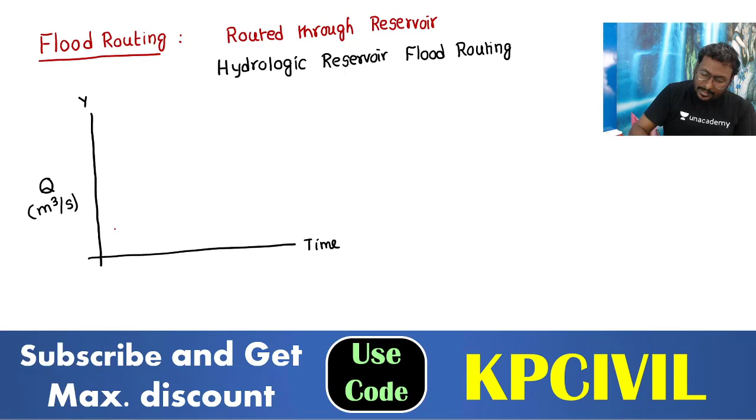Very importantly, the outflow flood hydrograph does not start immediately because there is storage, because there is a reservoir. Due to that reason, after a certain time delay, we get the outflow flood hydrograph. This is the peak of the inflow flood hydrograph, and this one is the peak of the outflow flood hydrograph.

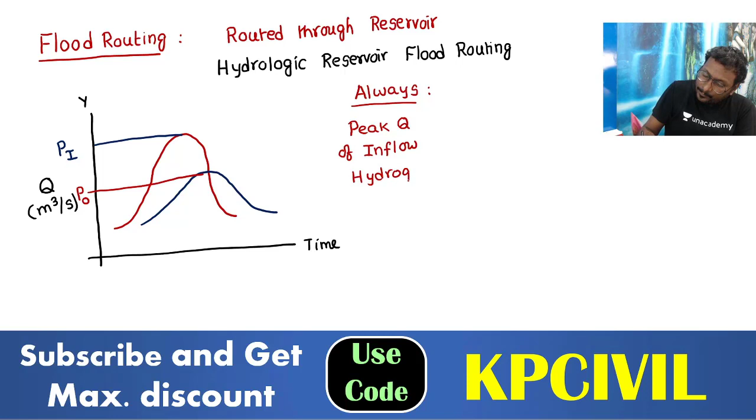Always remember this important statement we learn during hydrologic flood routing: the peak discharge of the inflow flood hydrograph is always greater than the peak discharge of the outflow flood hydrograph. No doubt about it. Because under any circumstances, if you are studying hydrologic reservoir flood routing, storage is going to happen between inflow and outflow. There is a time delay in the starting of inflow and outflow hydrographs. Ultimately, the inflow flood peak is more than the outflow flood peak.

Coming to the question: the peak of the inflow hydrograph is Pi, and the time of occurrence of the peak is Ti. From this, Pi we have already written. The time of occurrence is occurring here, which we will consider as Ti, time of occurrence. So the peak of the inflow hydrograph occurs at a time called Ti.

That is according to the given question. Next, the peak flow of the outflow hydrograph is P0 and the time of occurrence is T0. We write this down. So P0 is the peak of the outflow hydrograph occurring at time T0.

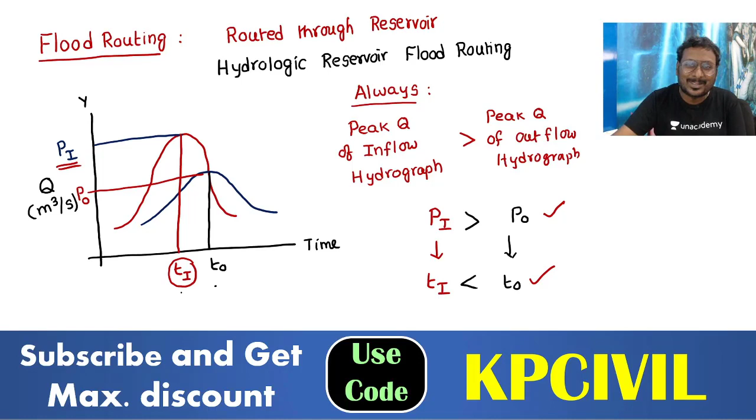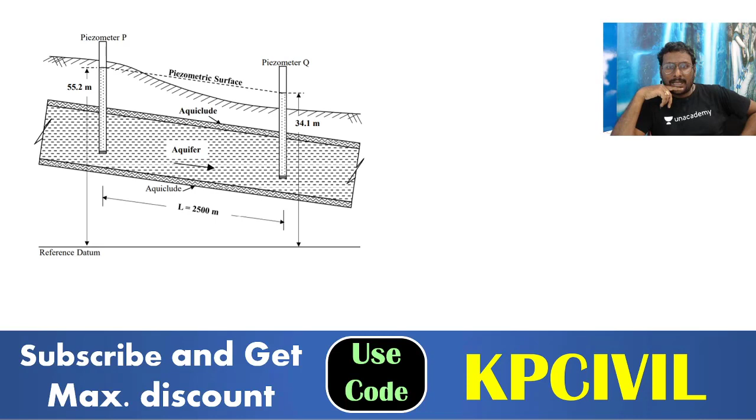Okay, next one. A confined aquifer of 15 meter constant thickness is sandwiched between two aquicludes as shown in the figure. Where is the figure? Where is the figure? So this is the figure. So confined aquifer of thickness 15 meter.

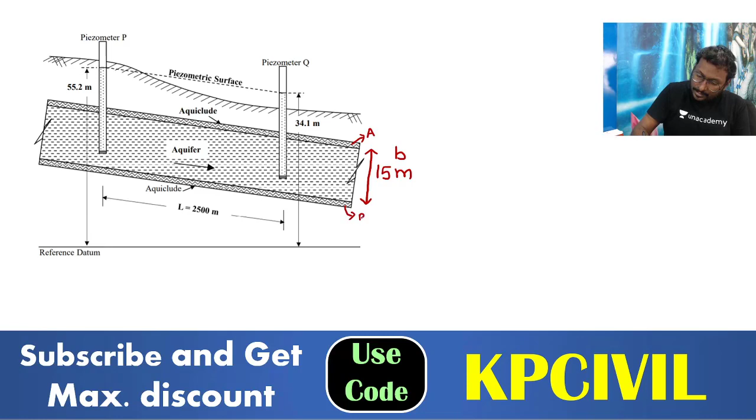This is the thickness of aquifer, depth of aquifer 15 meter. B, thickness of aquifer B, 15 meter, between two aquicludes. This is aquiclude 1, this is aquiclude 2. Take aquiclude A, aquiclude B. These are the two aquicludes provided.

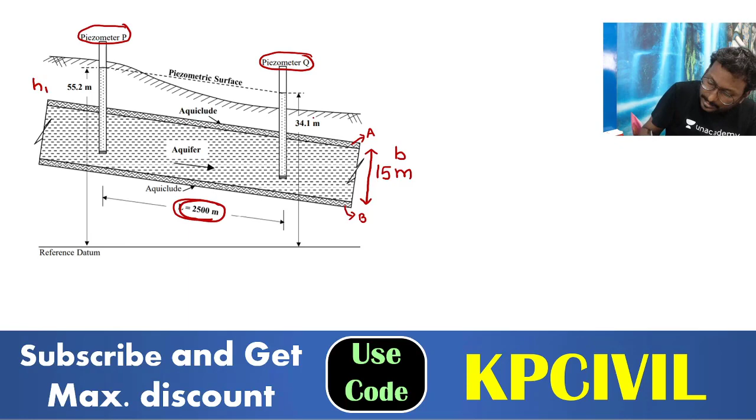And their distance between one well, one piezometer to other piezometer, piezometer P and piezometer Q, 2500 meters. The H1 is 55.2 meter, H2 is 34.1 meter. What is the question?

We'll go ahead. Two heads indicated by two piezometers P and Q, H1 55.2 meter, H2 34.1 meter respectively. Aquifer has hydraulic conductivity K value provided, 80 meter per day, and its effective porosity is 0.25, N is equal to 0.25. Distance between piezometers 2500 meters.

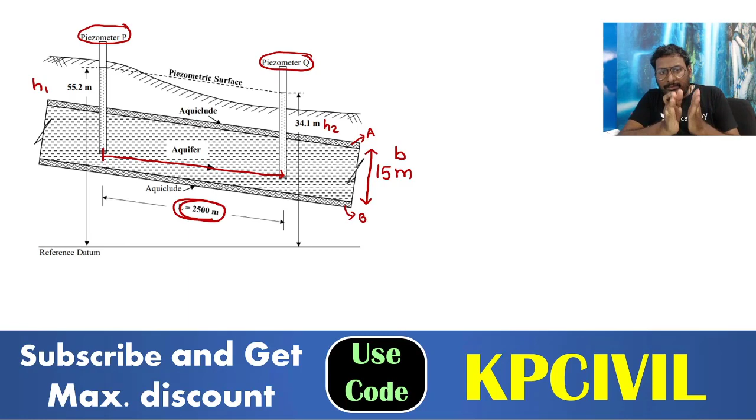The time taken by the water to travel through the aquifer from piezometer location P to Q, in days. So how much time will the water take to travel from this piezometer to this piezometer? Time taken by the water to travel from piezometer P to piezometer Q. Time is equal to...

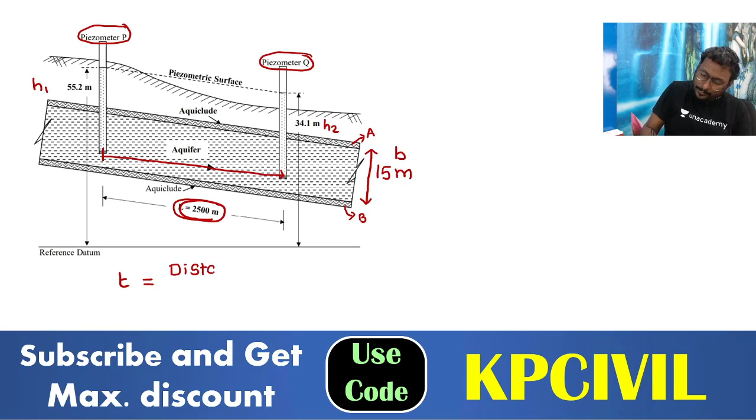General formula, several times we are studying this. Time is equal to distance by velocity. Distance already known, L. Velocity V to be determined. Distance given, 2500 meters.

So now we need to determine velocity. Velocity is equal to K into I. What is I? Gradient. I is gradient, delta H by L. That is equal to K into H1 minus H2 by L. Here, velocity is equal to K into H1 minus H2 by L.

But for flow velocity, the actual stream velocity required is the actual flow velocity, V by N. We can take the porosity provided. So the first one is apparent velocity, the second one is actual flow velocity. We'll consider actual flow velocity. This is V is equal to V by N.

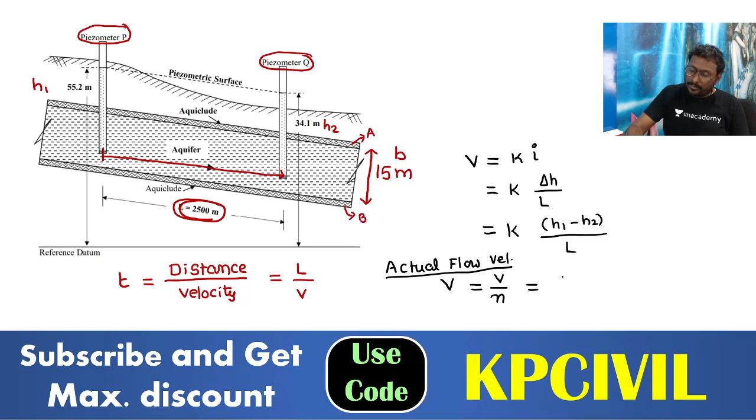So how can we write this down? K by N, H1 minus H2 divided by L. That is the actual flow velocity. So if you determine actual flow velocity, substitute that actual flow velocity in this formula to get time of travel.

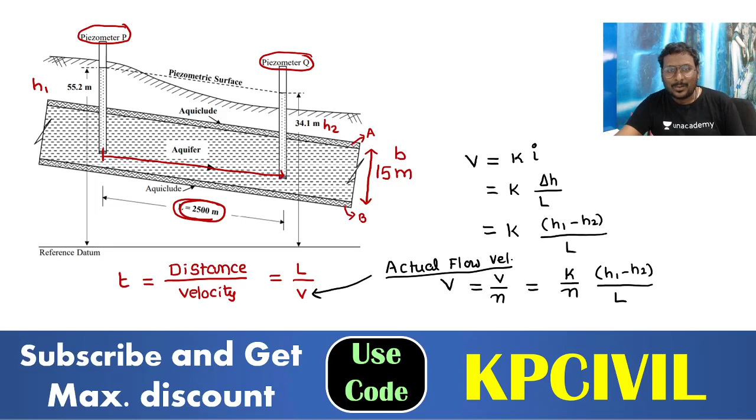Okay, we'll move ahead. Now, actual flow velocity V is equal to K, 80 meter, divided by N. What is N? Porosity. Porosity provided, N we have written here, 0.25. H1 minus H2, H1 is 55.2, H2 is 34.1.

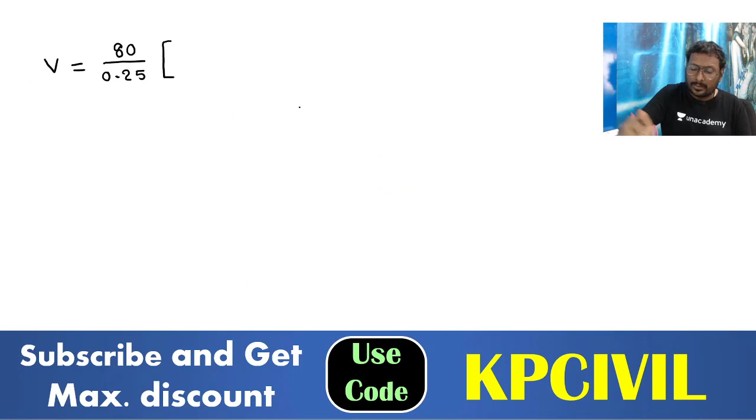We write down 55.2 minus 34.1. Length of travel, distance of travel, 2500. 55.2 minus 34.1 divided by 2500. So we got the velocity. Estimate this velocity: 80 by 0.25 into 55.2 minus 34.1 divided by 2500. What is the velocity you are getting?

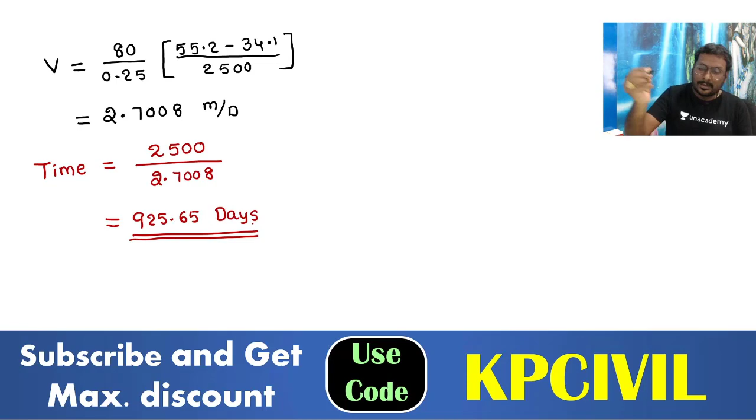2.7008 meter per day, because hydraulic conductivity is given in terms of day only. So now time required is equal to length 2500 meter, distance of travel, velocity 2.7008 meter per day, you are getting time in number of days. This is the value: 925.65 days. You substitute, write down 925.6 days, rounded off to one decimal value. So the question is related to what topic?

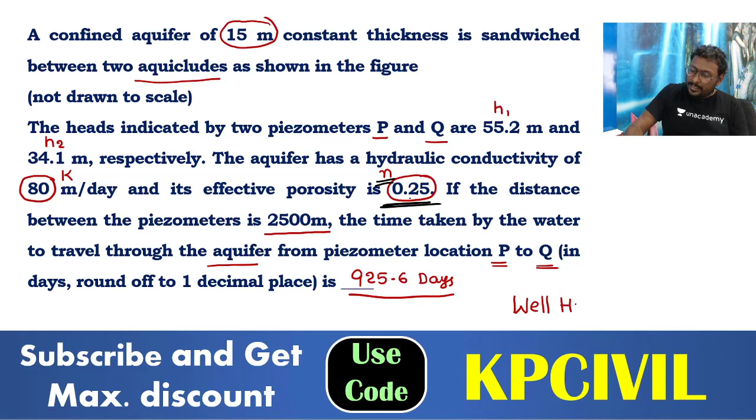Well hydraulics. The question is related to well hydraulics. Previous one is flood routing. Now this one is well hydraulics.

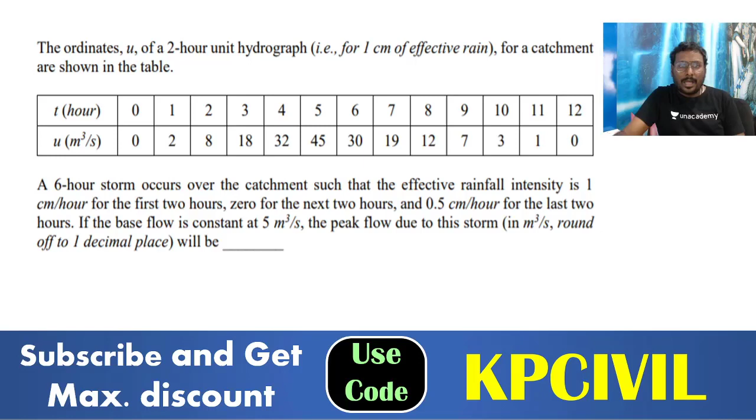Okay, we'll move on. Hydrograph. Always we have one mandatory question related to hydrograph. In my several classes also I used to say, without hydrograph there is no GATE question paper. Again we have the hydrograph question. The ordinates U of 2-hour unit hydrograph. Unit hydrograph is nothing but for 1 centimeter effective rainfall, for a catchment area as shown below. So T and U, unit hydrograph ordinates, 0 to 12 hours, each 1 hour time difference. U is discharge in meter cube per second, unit hydrograph discharge for each 1 hour.

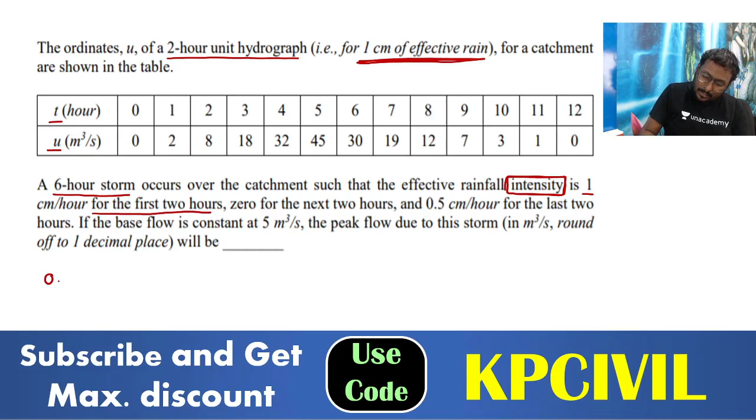A 6-hour storm occurs over a catchment such that effective rainfall intensity - very important point - the data provided is effective rainfall intensity 1 centimeter per hour for first 2 hours, so 0 to 2 hours. What is the rainfall intensity? 1 centimeter per hour.

You write down effective rainfall depth in such a case. Intensity given is 1 centimeter per hour. What is depth in such a case? For 2 hours, for 1 hour 1 centimeter, for 2 hours 2 centimeter depth.

0 for next 2 hours. No problem, 0. For next 2 hours, 3 to 4 hours, it is 0 centimeter per hour. You take next 2 hours depth is 0 centimeter. No need to consider at all, not required that one.

And 0.5 centimeter per hour for last 2 hours, 5 to 6, last 2 hours. 0.5 centimeter per hour, so for 1 hour 0.5 centimeter. For 2 hours how much? For 2 hours we can take 0.5 into 2, that is equal to 1 centimeter. So effective rainfall depths for each 2-hour duration: first 2 hours 2 centimeter, next 2 hours 0, next 2 hours 1 centimeter.

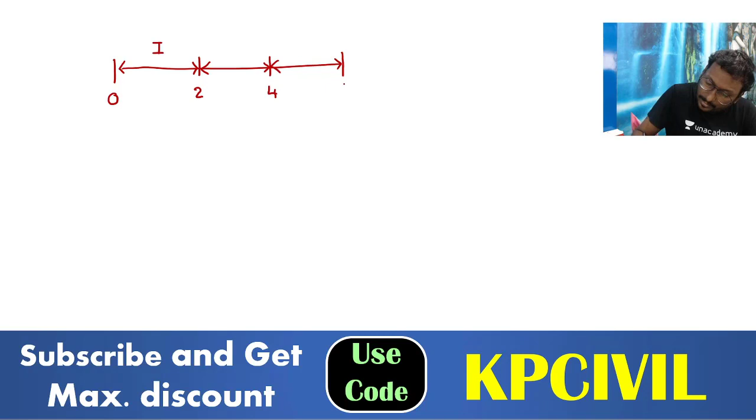So I will plot this, so that it is easy for you. This is a 6-hour rainfall. First rainfall 0 to 2. Second rainfall 2 to 4. Third rainfall 4 to 6. 3 rainfalls given, total 6-hour rainfall. Total 6-hour storm event divided into 3 individual storms.

First rainfall of 2 centimeter depth. Second rainfall of 0 centimeter depth. Third rainfall of 1 centimeter depth. Okay. P1, P2, P3. Actually, these are not rainfalls - remember, effective rainfall, direct value. Effective rainfall depths only, direct values.

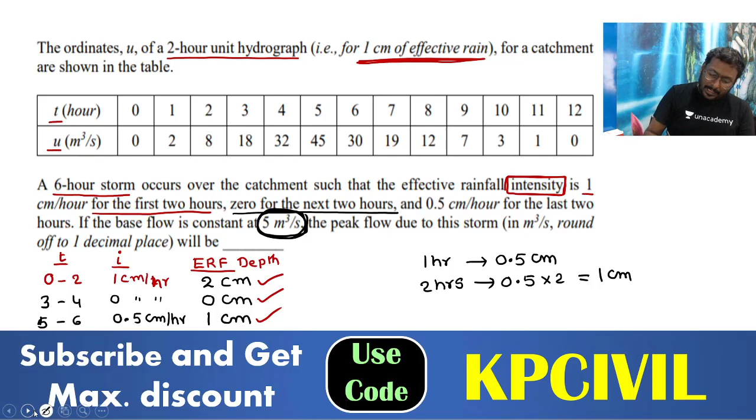Done. The base flow is constant at 5 meter cube per second. Peak flow due to the storm - peak flow means what you need to determine? Discharge of flood hydrograph. Peak discharge of flood hydrograph for the storm is how much? This is to be determined. That is to be determined. But very complicated thing here.

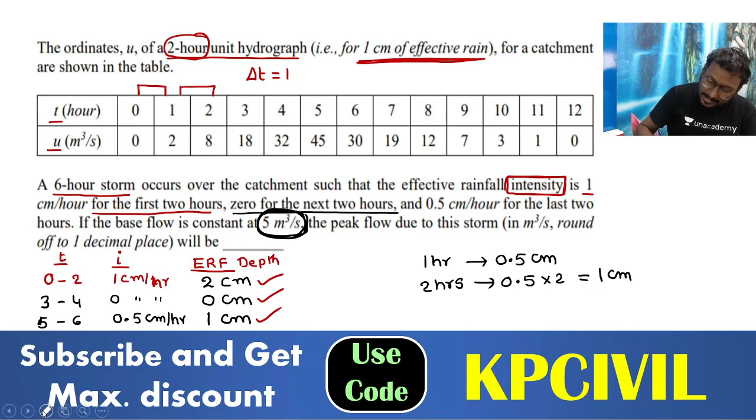Given is 2-hour unit hydrograph. The time difference provided, delta T provided, data provided is for 1 centimeter - sorry, 1 hour. The time difference provided is for each 1 hour they have provided. But rainfall occurred is a 2-hour unit hydrograph. Okay, we'll move on now.

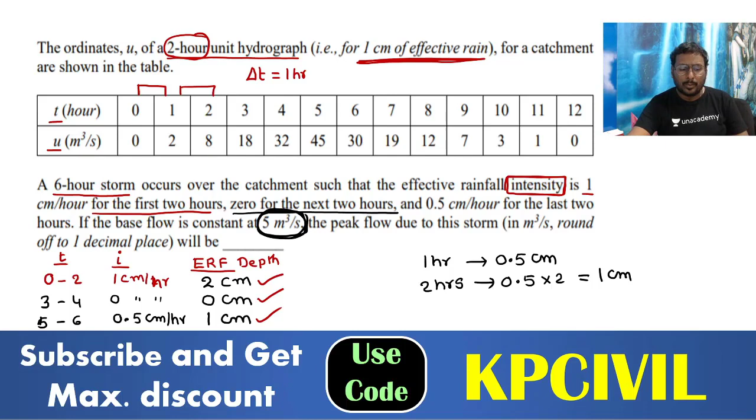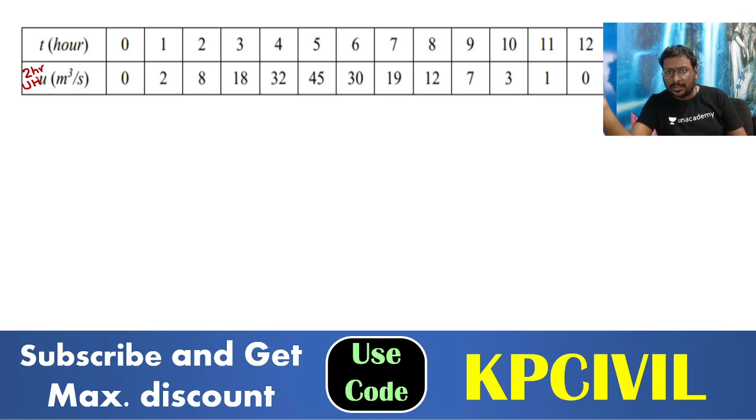So this is the data as it is you are writing. You write down same table, same column, given data you are writing same. This is a 2-hour UH ordinates, given from first hour onwards: first hour, second hour, third hour, fourth hour. First hour onwards they have provided.

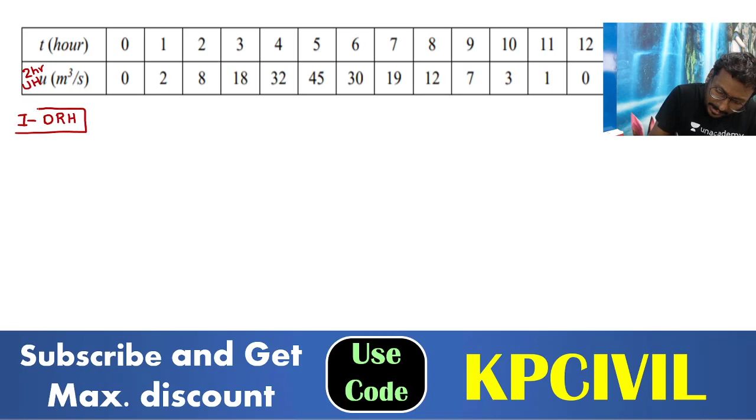Now, DRH for first rainfall - direct runoff hydrograph for first rainfall. So you have already UH. So DRH is equal to QUH into effective rainfall depth. QUH into effective rainfall depth we are taking.

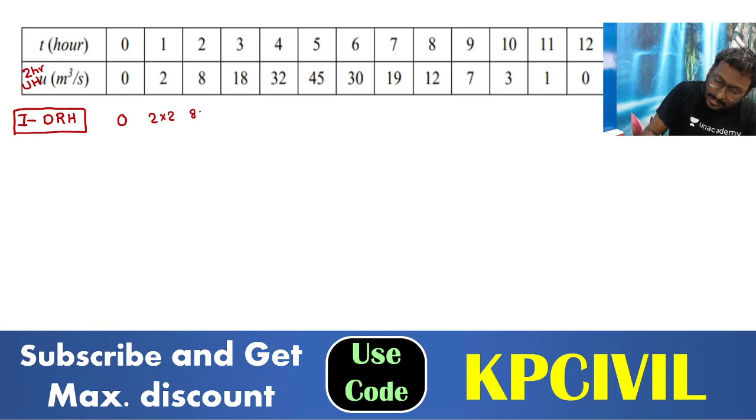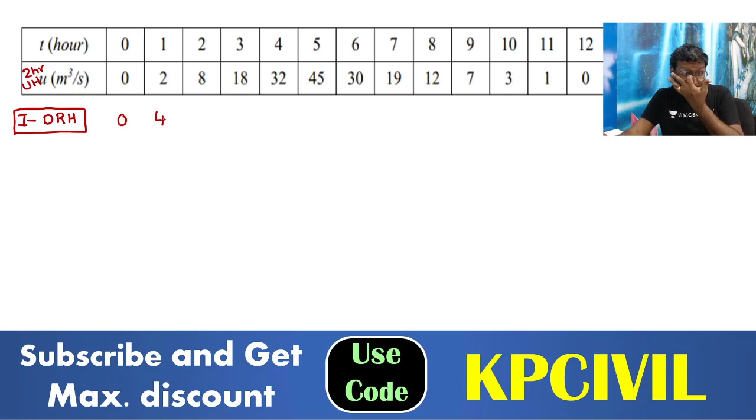So as it is, for the first rainfall, it is started at 0th hour, produced discharge on the first hour itself. So as it is you take multiplied with 2. Means you can write down 0, 2 into 2, 8 into 2, 18 into 2, like that you can multiply, 32 into 2. So I am writing direct multiplication values here. 2 into 2, 4. Why am I multiplying, tell me? Because effective rainfall is equal to 2 centimeter.

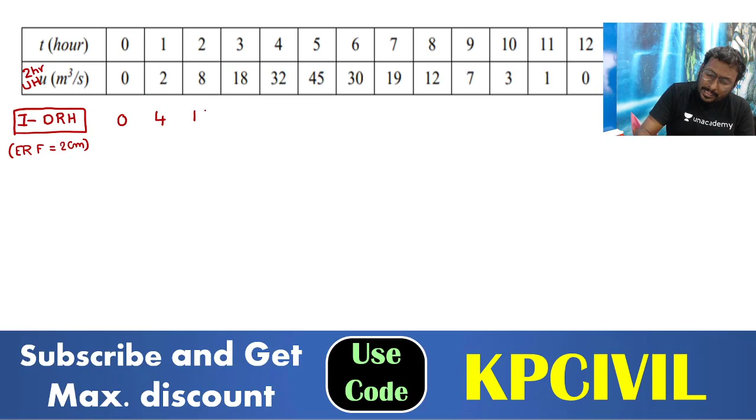DRH is equal to UH into effective rainfall. So 2 into 2 is 4, 8 into 2 is 16, 18 into 2 is 36, 32 into 2 is 64, 45 into 2 is 90, 30 into 2 is 60, 19 into 2 is 38, 12 into 2 is 24, 7 into 2 is 14, 3 into 2 is 6, 1 into 2 is 2.

Is it necessary to take second rainfall? Second rainfall not at all required. Directly I am jumping to third rainfall, because second rainfall has not yet produced any kind of depth. So all DRH values of second rainfall are 0, because you are multiplying with the direct runoff. If DRH values are taken as 0, then 2 into 0, 8 into 0, 18 into 0, all are 0 values only. No need to take second rainfall, not required.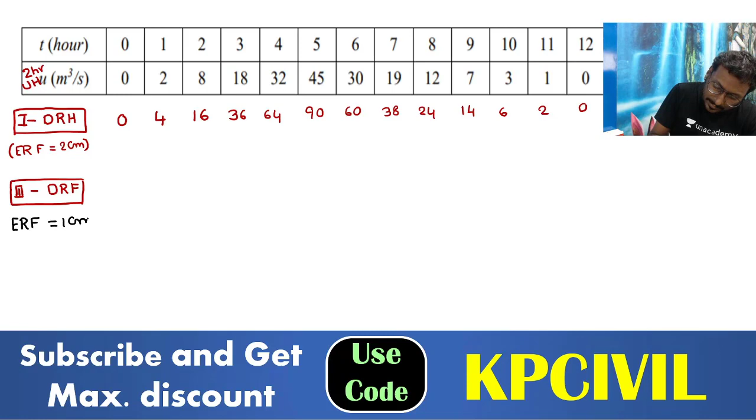We are considering third rainfall, effective rainfall depth of 1 centimeter. Third rainfall is contributing, given clearly, effective rainfall of 1 centimeter. When it started discharge is very, very important. The third rainfall started discharging at the 5th hour. So the discharge value starts at the 5th hour. Before the 5th hour, all values are taken as 0, not considered. Only from the 5th hour you can start the values. So you take here 0, 0, 0, 0, 0. Then as it is, you can consider these values delayed by 4 hours. Lag or delayed by 4 hours.

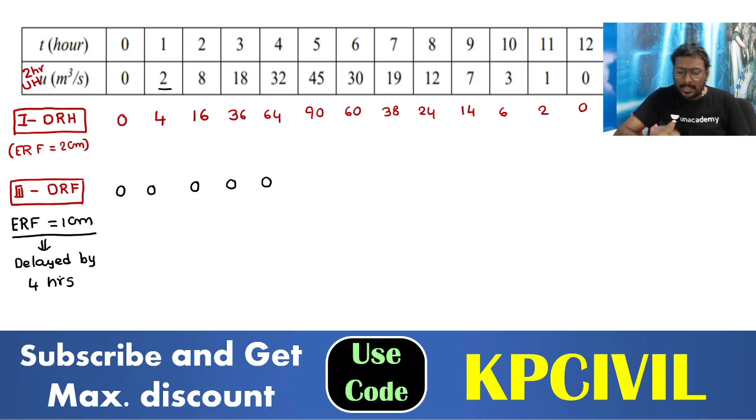From the fifth hour onwards, you write down the same value. Same, why are we writing the same? Because it is 1 only, 1 centimeter only. It is 2 centimeter that we multiplied earlier. Now it's 1 centimeter only, so just as it is, we are writing 2, 8, 18, 32, 45, 30, 19, 12, 7, 3, 1, 0. We don't want all the values because we need peak discharge.

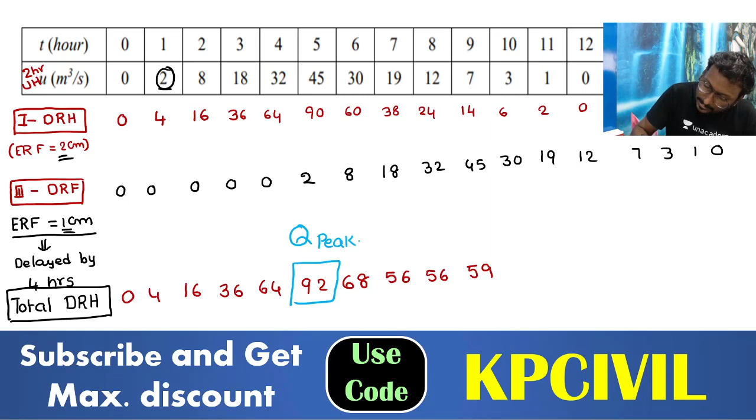We need only peak discharge, we don't want all the values. So what is the highest of the given values? Add it now, total DRH we can write down. Total direct runoff ordinate values, total DRH values, you just add it now. So while adding, what is required? 0, 4, 16, 36, 64, 92, 68, 56, 56, 59. Do you need all this? No, only peak. Already you attained the peak now. You got the peak value now. Already you obtained the peak. This is Q peak of what? DRH. So Q peak of DRH you got is 92.

The question is about peak discharge of FH, the flood hydrograph peak discharge. Flood hydrograph peak discharge is equal to direct runoff hydrograph peak discharge plus base flow. So we can take it now: 92 is the direct runoff hydrograph peak discharge, plus base flow. We identified 92. Base flow is 5 meter cube per second, you can take directly. 92 plus 5 is 97 meter cube per second. So flood hydrograph peak discharge is equal to direct runoff hydrograph peak discharge plus base flow, 92 plus 5, that is equal to 97 meter cube per second. Okay, simple question. 97 meter cube per second, you are getting the answer.

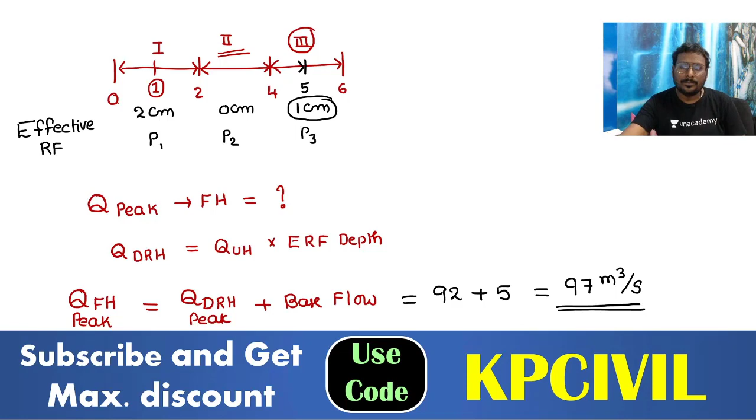You move on to the next one. Clear for everyone? You go ahead.

A catchment may be idealized as a rectangular catchment. There are 3 rain gauges located inside the catchment. So this may be taken as a catchment, with 3 rain gauges A, B, C given at arbitrary locations. The average precipitation over the catchment is estimated by 2 methods: Arithmetic mean method and Thiessen polygonal method. Which one of the following statements is correct?

PA is always greater than PT? No. PA is always equal to PT? There is no relation. First of all, there is no relation between the arithmetic mean method and Thiessen polygonal method, so we can't say whether it is equal to, greater than, or smaller than. So what is the answer? There is no definite relation between PA and PT, they are just 2 independent methods. Arithmetic mean method and Thiessen polygonal method are 2 different independent methods, there is no direct or definite relationship between PA and PT. So the answer is option D.

Okay, we'll move on. The probability that annual maximum flood discharge will exceed 25,000 meter cube per second at least once in the next 5 years. At least once means P1 in the next 5 years. P1 in the next 5 years is found to be 0.25.

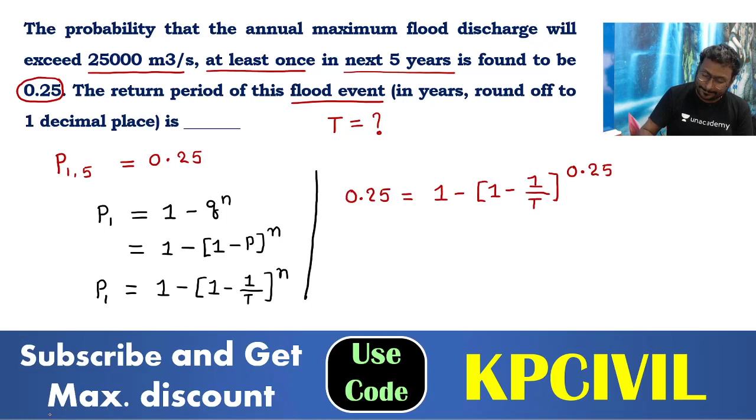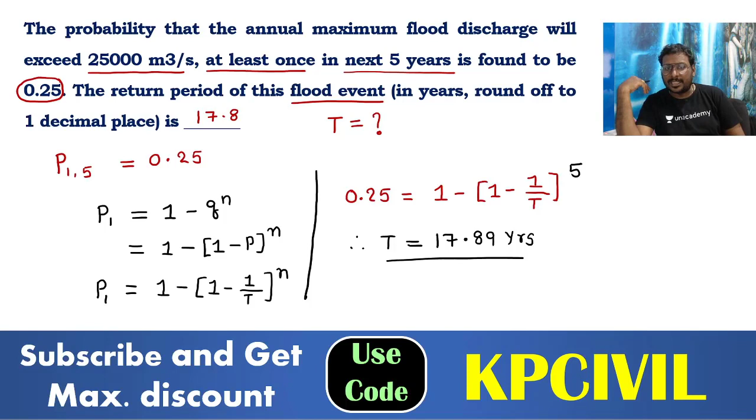0.25, P1 is equal to 1 minus 1 by T, this is to be determined, whole power N. Wait, what is N value? N value is 5. So 0.25 is equal to 1 minus 1 by T whole power 5. So what is T? Determine it, solve it. Solving, you get T value: 17.89 years. So the return period is 17.89 years. Up to one decimal place, you can say 17.8 or 17.9 years, anyone will be accepted. So in the return period formula, P1 is equal to 1 minus 1 by T whole power N. P1 and N substituted, T is obtained as 17.89 years. We move on to the next.

If you remember the formula, all questions related to flood frequency are completed, because it includes everything: Q is equal to 1 minus P, P is equal to 1 by T, and this itself is taken as hydrologic risk R. Both are taken to be the same — at least once occurrence. Okay, we'll move on.

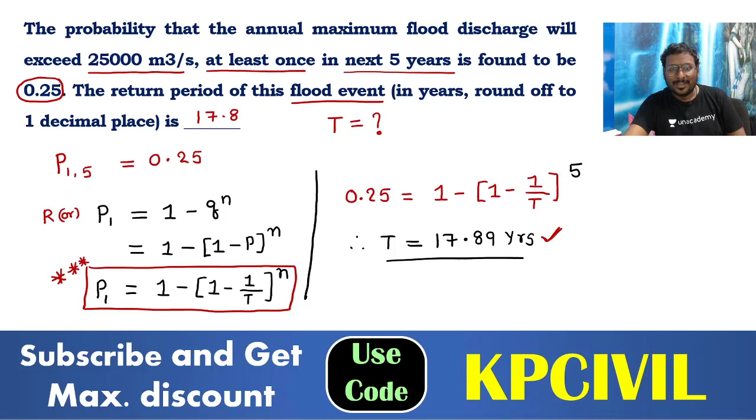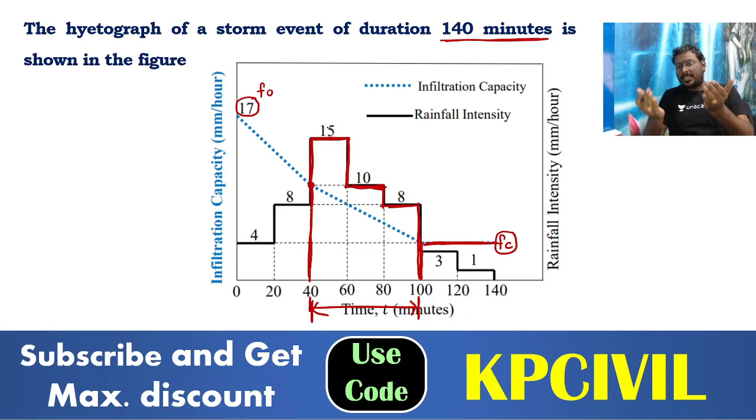As the event progresses, the infiltration rate further drops linearly to attain a value of 4 mm per hour at T equal to 100 minutes. That is shown now: at T equal to 100 minutes, infiltration capacity becomes 4 and stabilizes. So before the 40th minute and after the 100th minute, we don't need the data, because that data represents rainfall that is completely converted into infiltration. So we will consider only the period from the 40th to the 100th minute. Before that, whatever rainfall occurred is 100% converted into infiltration. So we consider only these values.

We can write it down like this now, draw it like this now. This is what's going to occur, and this is to be considered: this is the 40th minute, this is the 60th minute, 80th minute, and 100th minute. Here the total height is 15, here it's 10, and here it's 8. Where can we show FC in that case? So FC we can show here now — this is taken as FC, considered as FC, which is 4. We can write down 4 here.

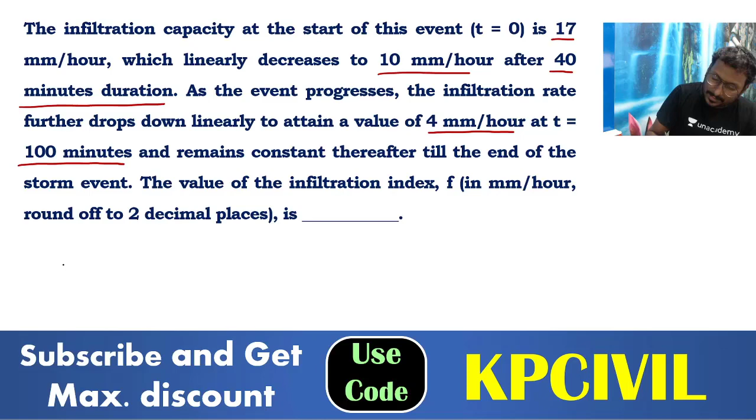What is required first of all? And it remains constant thereafter till the end of the storm event. The value of infiltration index F, rounded off to 2 decimal values — if you take F or phi, it's the same thing, right? Infiltration index F, or we'll take it as phi, is equal to precipitation minus runoff, divided by effective time duration.

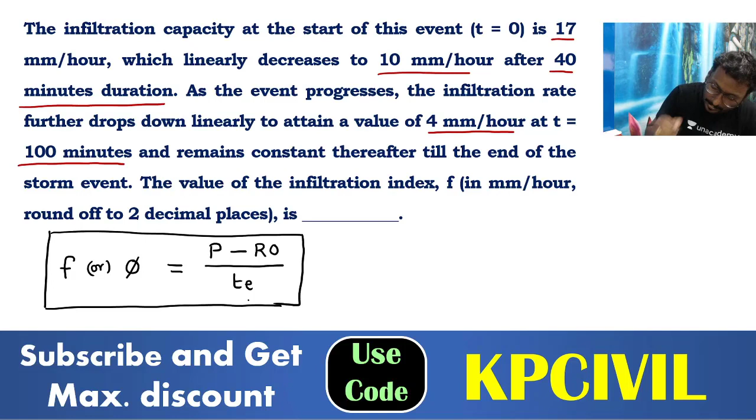From the given diagram, what is the effective time? It's the time at which infiltration is less than rainfall. In these two times, infiltration is greater than rainfall, so F, infiltration, is taken as greater than the intensity of rainfall. So up to this point we neglect it because F is greater than I, and after this also F is greater than I, so we neglect this. But between the 40th minute and the 100th minute, what happened?

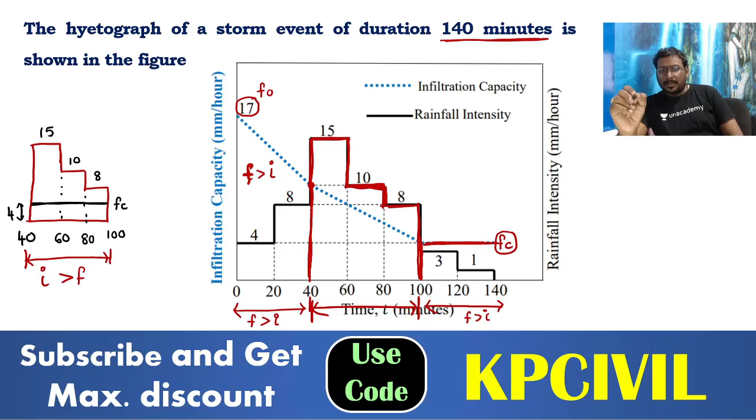Rainfall intensity is greater than infiltration from the 40th minute to the 100th minute. That is called effective time, and that is equal to 60 minutes.

Now, what is to be considered? Rainfall depth is required; effective rainfall depth is to be estimated. How can you estimate it? Using this diagram, you are going to determine the effective rainfall depth.

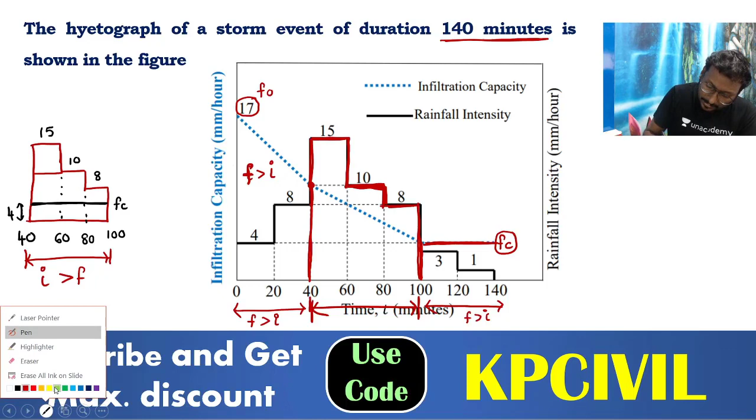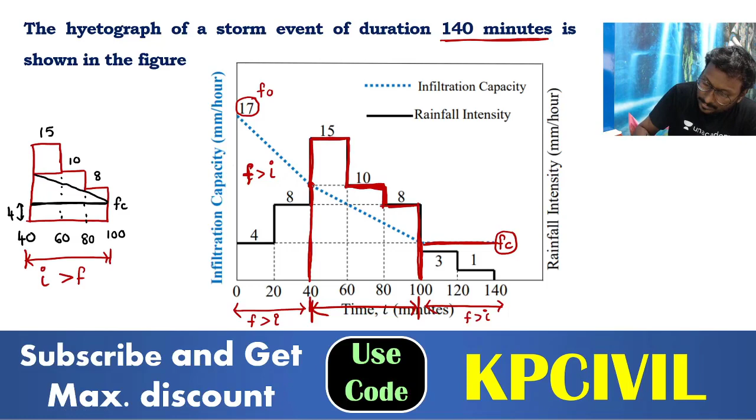So you can divide the diagram. This portion is one rectangular portion because it is falling down linearly from this point to this point, so you can divide this as one rectangular portion. What is the height here? 5. And what is the width? 20 minutes.

And the second one, you will consider this as a triangle. What is the height of that triangle? This height, from 10 to 8, is 2, and again the width is 20.

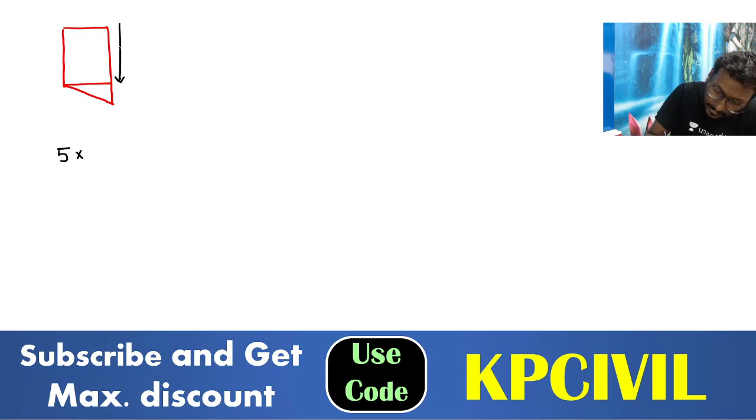So I am going to plot for the first one using a formula like this. This portion, the rectangle, has height 5, and this is 2. What is the base? 20 minutes, converted to hours as 20 by 60.

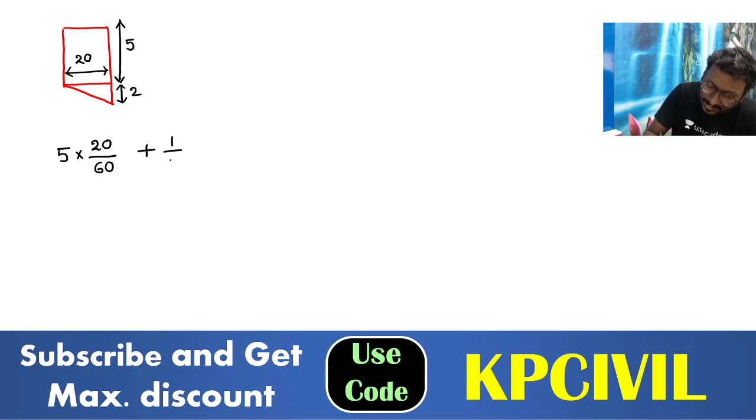Plus this portion, the triangle: half into base, 20 by 60, height 2. This is for the duration between the 40th minute to the 60th minute: 5 into 20 by 60, plus half into 20 by 60 into 2.

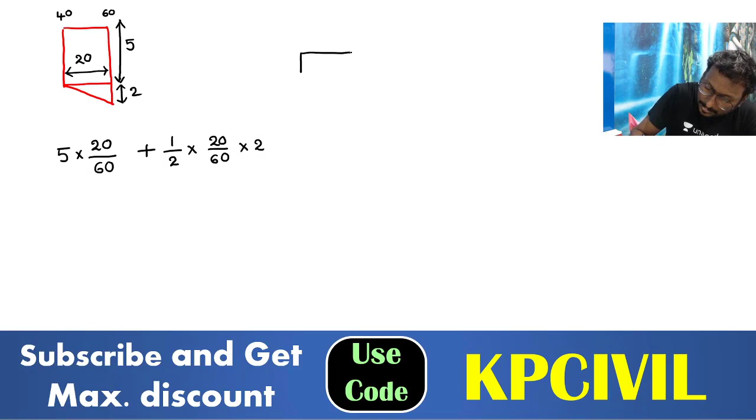Now the second portion. For this, simply, the height is 2 and the width is 20 minutes, and this total I have taken as one rectangle. I will plot for that block with height 2 and width 20 minutes: 2 into 20 by 60.

So again I am repeating, I am clearly explaining, listen carefully. I am taking this first one as this block, this is Area 1 (A1), for which I am plotting one rectangle and one triangle. This rectangular box I am taking as A2.

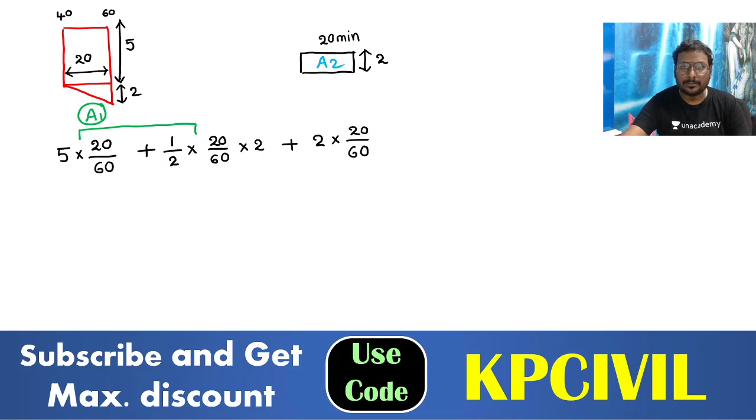Then what about the third one? This total we will consider as the third one. What is the total height here? Total height is 4, from 8 to 4.

This total base, from 60 to 80, 80 to 100, that is 40. So we consider this total triangle and plot it as A3. This height is 4, this base is 40, so half into base 40 by 60 converting to hours, into height 4.

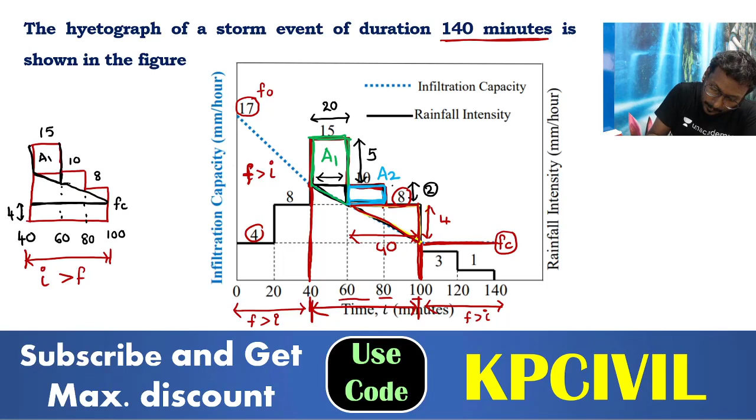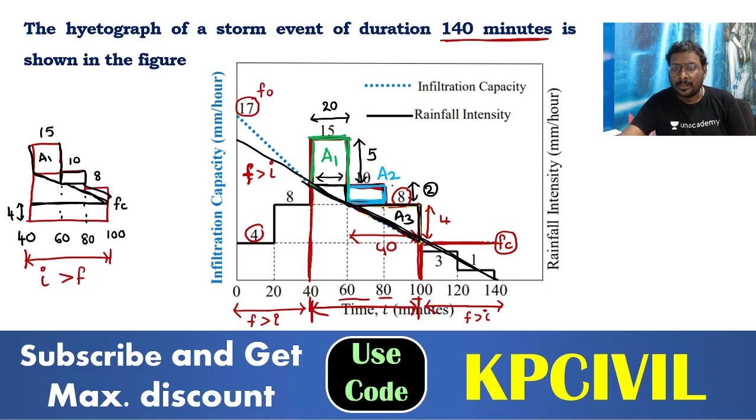So in total, how many divisions have we done? Three divisions. That diagram has been divided into three components: A1, A2, A3. This portion is A1, this portion is A2, and the remaining total portion is taken as A3. Is it clearly visible from this diagram? Whatever is above is given as infiltration only, so because of that reason, we have considered these three portions, A1, A2, A3.

So finally, what are you getting? Effective rainfall, runoff. What is your runoff now? Finally, you are getting runoff equal to 4 mm.

Runoff is equal to 4 mm. You are getting total runoff is equal to 4 mm. Now what is the rainfall precipitation P?

Precipitation P: 15, 5 and 8. That is 15 plus 5 plus 8, each for 20 minutes duration. We considered only the parts which are contributing excess, considering the effective time for 3 rainfalls: 40 to 60 minutes 15 mm, 60 to 80 minutes 10 mm, 80 to 100 minutes 8 mm. So 20 by 60, to convert minutes to hours, we have taken.

That is 11 mm. So what is infiltration now?

Phi index is equal to P minus runoff by effective time. P is 11, runoff is 4, effective time duration is 1 hour. So it is 7 mm per hour.

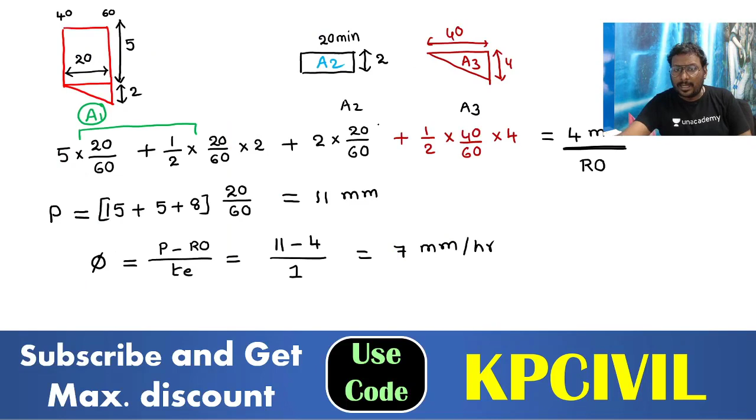Why is effective time duration 1? Because 60 minutes I will take as 1 hour. Only 3 components clearly mentioned, 40 to 100th minute, so T is equal to 1 hour. Effective time 1 hour, and effective rainfall estimated as 15 plus 5 plus 8 into 20 by 60, equals 11 mm.

11 minus 4 by 1, equals 7 mm per hour. It is the most complicated question.

You divided the given hyetograph plot into individual areas. This is the important part: A1, A2, A3. If you divide into individual parts areas, your question is completed.

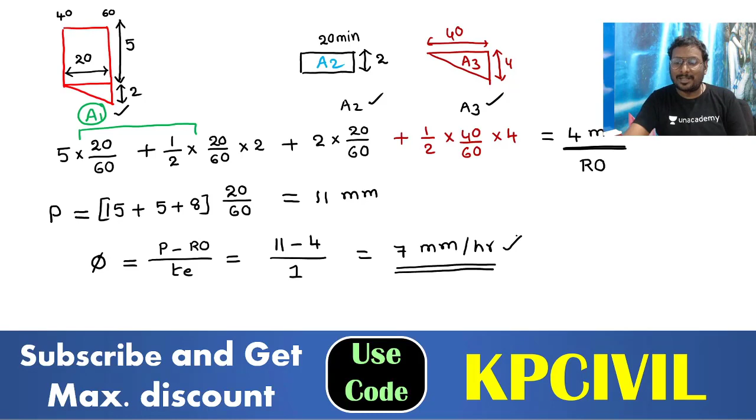Answer is 7 mm per hour. Clear for everyone? So you write down here 7.

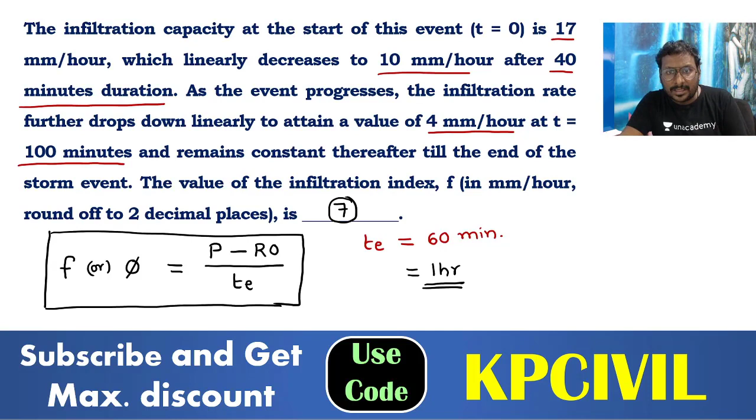If you listen to the class only once, it is difficult for you to understand. Go through it twice or thrice, because dividing the areas is a very important portion in the question. Be careful, divide it properly according to the graph, then you solve the question. That is easy for you to plot.